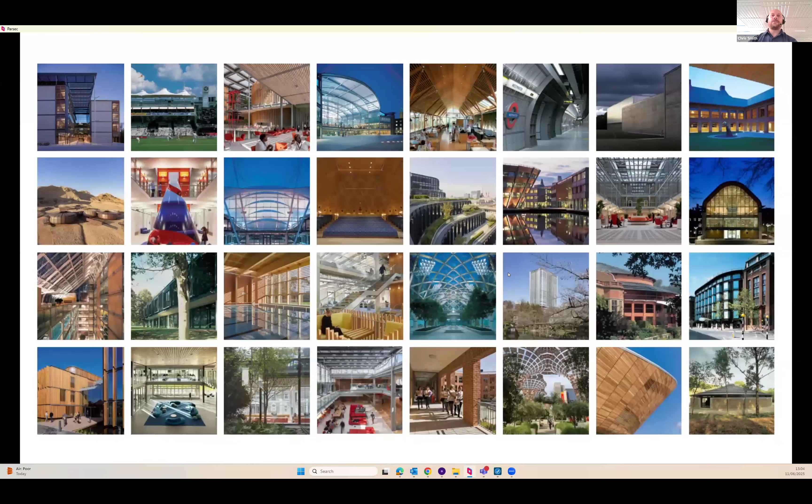So it's just a slide for Hopkins. It shows a vast array of experience and various projects over numerous sectors over the last 40 years. And I think it shows an honest expression of materials and context and engagement with the historic heritage.

And as it's a timber development talk, we've just shown a few examples here where we have used timber in the past, particularly internally. And you'll see some of the details here will relate quite directly to Haileybury as well.

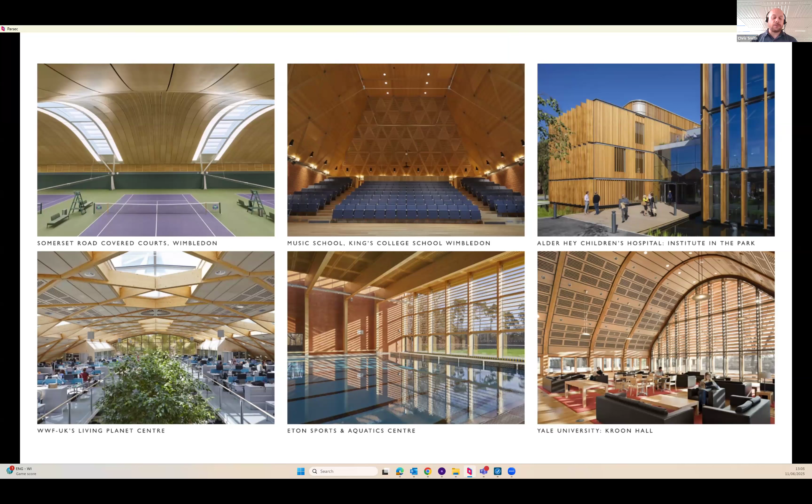Now, I didn't actually go to Haileybury School, but I did go to school quite close by and did sneak into their football pitches every now and then. So I've got a vivid memory of kicking the ball over the fence from about 3 yards out and probably hitting our site from here to here. So that was quite a while ago now.

So yeah, as you can see, the site is to the south. We've got the design technology block. You've got Baker science block, biology, and maths.

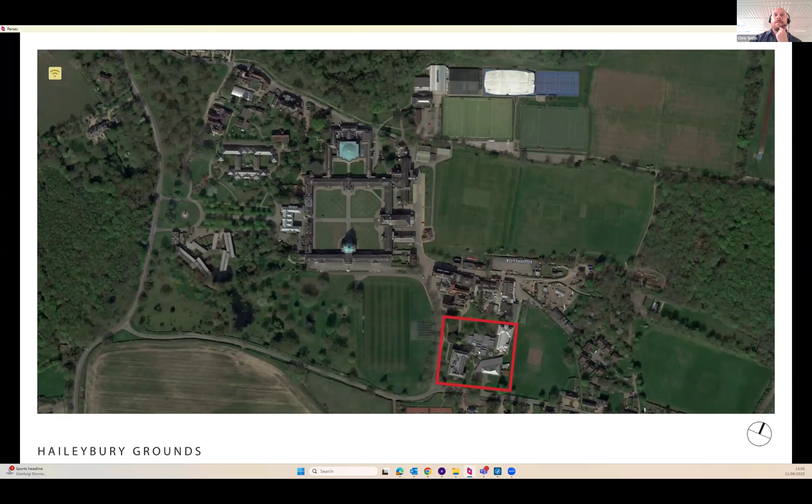So, history of Haileybury. It was designed in 1806 by William Wilkins as part of the East India Company and the East India College. It was opened in 1809. Big, strong quad in the middle. It was closed in 1858 and reopened as a public school. So it basically became Haileybury School in 1862.

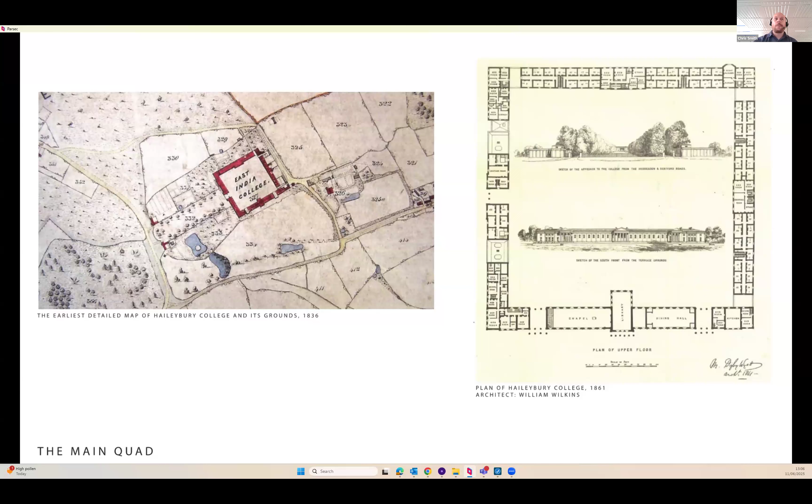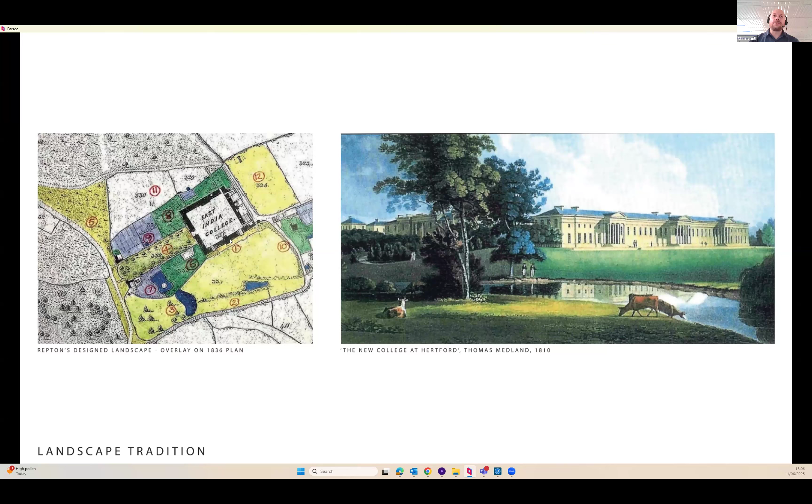So lots of history. It's also got Humphrey Repton landscape design. So this is also a view from Thomas Medland. I think this might be in the Royal Academy as well. So that's just a view from the lake over here back towards the main quad by Wilkins.

Now our site is down here, which is close to the entrance of Haileybury School. You've got Hailey Lane, College Road, and then you've got the Baker building, as we're calling it, which is also the science block, which is shown as moderate significance.

Now this was built in 1932, so it has curtilage listing. So that was built pre-July 1948. So basically, it's got the same sort of restraints as the rest of the listed buildings in the area.

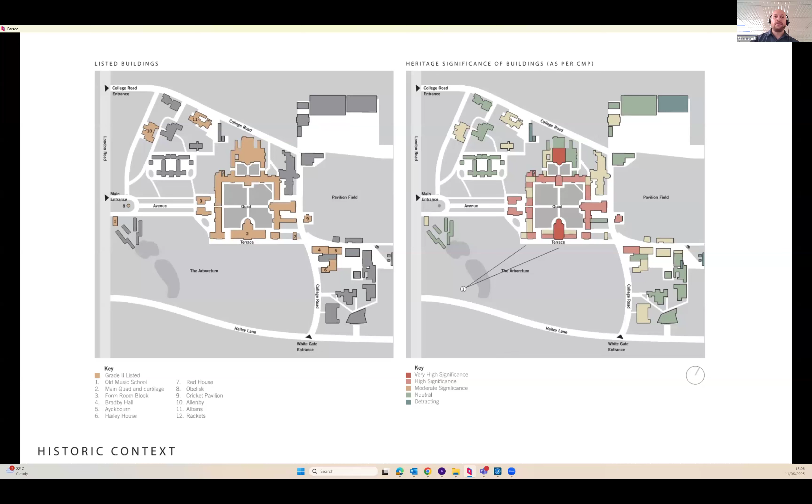So we go forward. So they've got a few examples of buildings on site, quite grand, mainly brick, sort of well proportioned, good rhythms to the facades, and that was kind of the context and the inspiration that we drew on.

So you've got lots of William Wilkins again, and Arthur Blomfield, and Herbert Baker, who we'll come to, but he did this building here, which is basically the one backing onto the site, and the one we connected to, which we'll see in a second. So this is coming down from the main quad. We've got a language of red brick, so strong red brick throughout, all the way to the entrance.

So then existing buildings on the site. So this was as existing. So you've got the biology here, which was kind of single story, not in great shape. Asbestos was found throughout. It was noted as detracting from the historic setting by the conservation area.

We've got maths here, which we didn't actually touch in the end, but we have created a better link to it. We've got the existing design technology building here. Not massively exciting from the facade, but quite an interesting roofscape, and actually it's a building that was working quite well. And then, as I say, we've got Baker here.

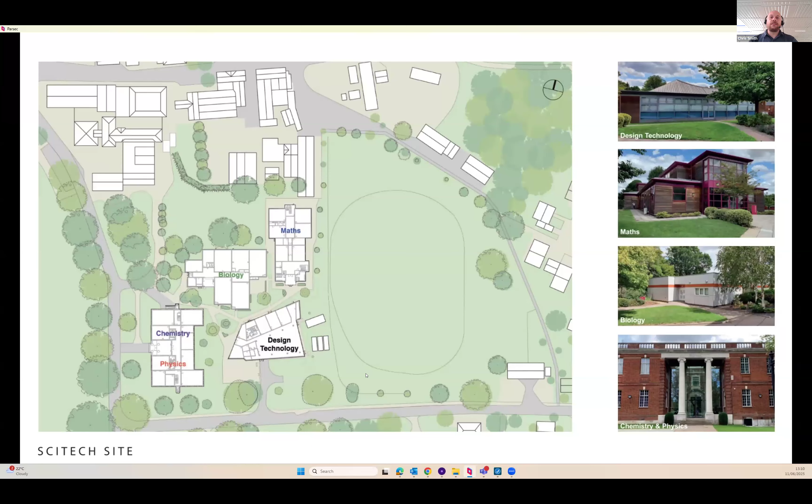So this is looking from College Road to the quite grand entrance, which again is this image here. So you can see on plan, we've got the entrance here. Previously it was just a corridor, and you've got your physics and chemistry labs within.

So to the rear, it's a slight level change, very much inward facing, no access to this side at all. It's all kind of coming through here, through the main entrance, and actually most students were coming through this sort of side entrance anyway.

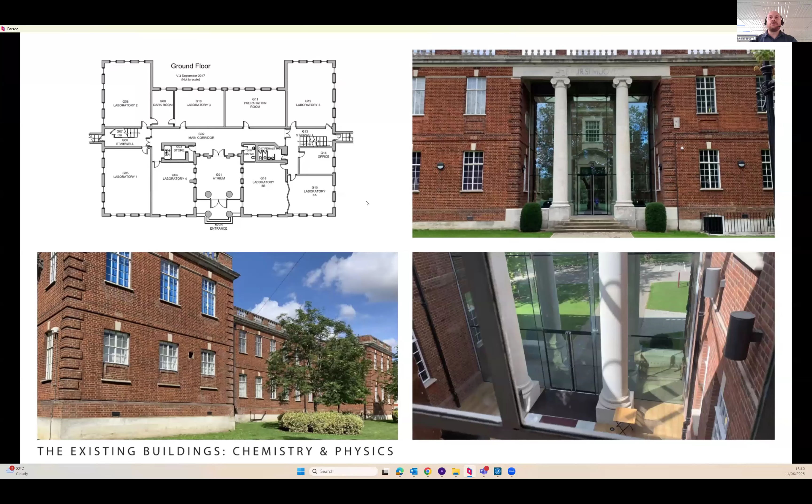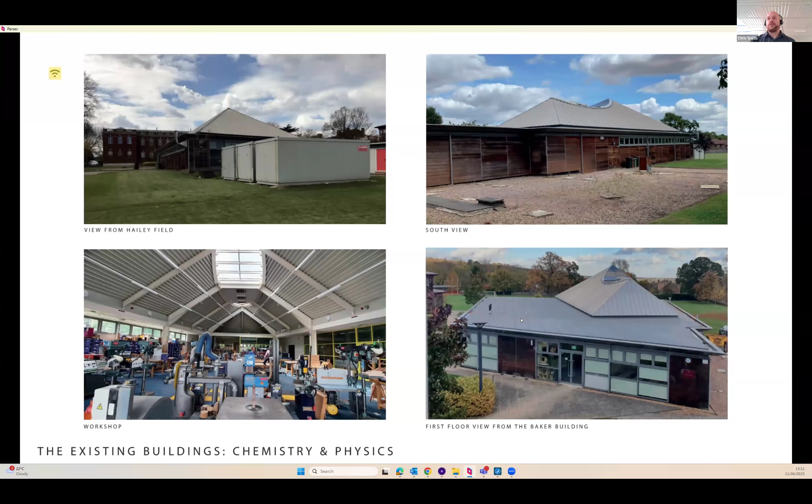So the brief. So essentially, we're taking the four aspects of science, technology, engineering, maths. They wanted to bring them together and create a culture of interdisciplinary learning. So very much a collaborative approach.

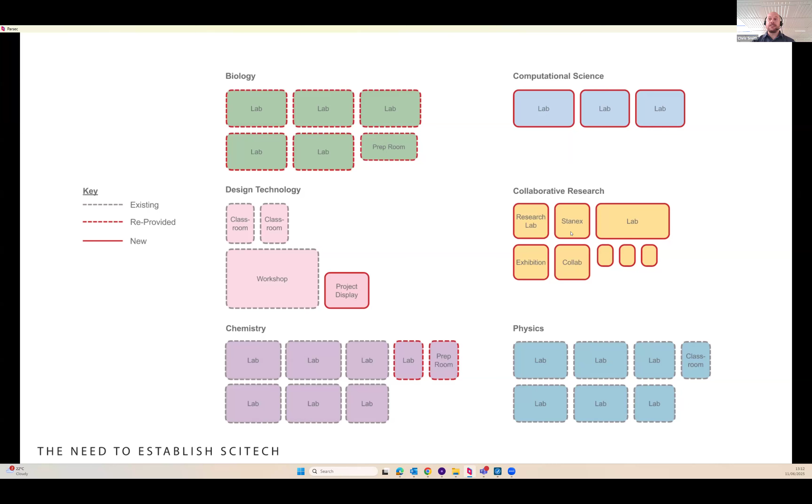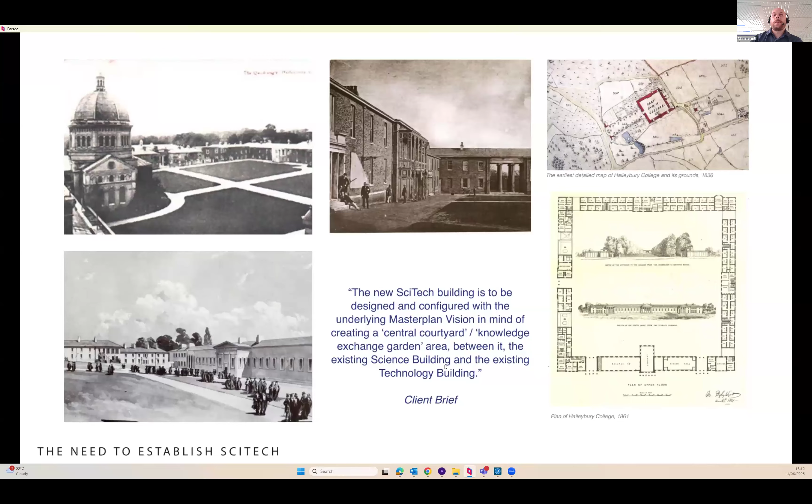So this was a brief follow. I'll come on to it in a second, but there was a master plan, and this was the client brief. So the new SciTech building is to be designed and configured with the underlying master plan vision in mind, creating a central courtyard, knowledge exchange garden area between the existing science building and technology building. So again, that's as it was.

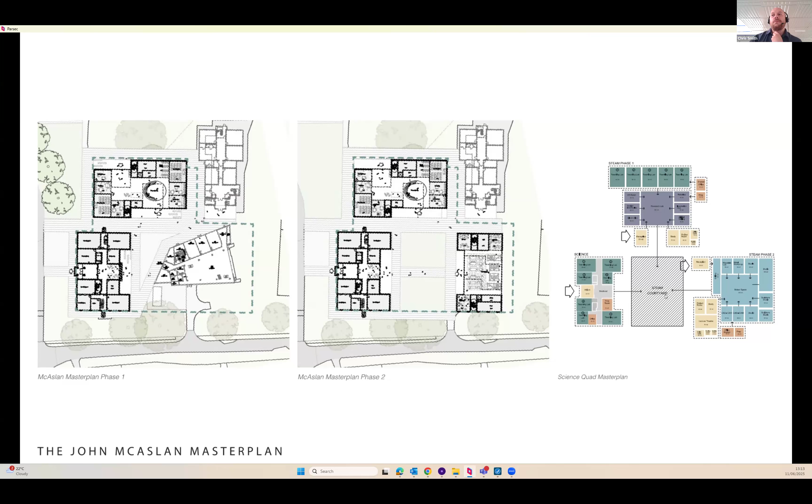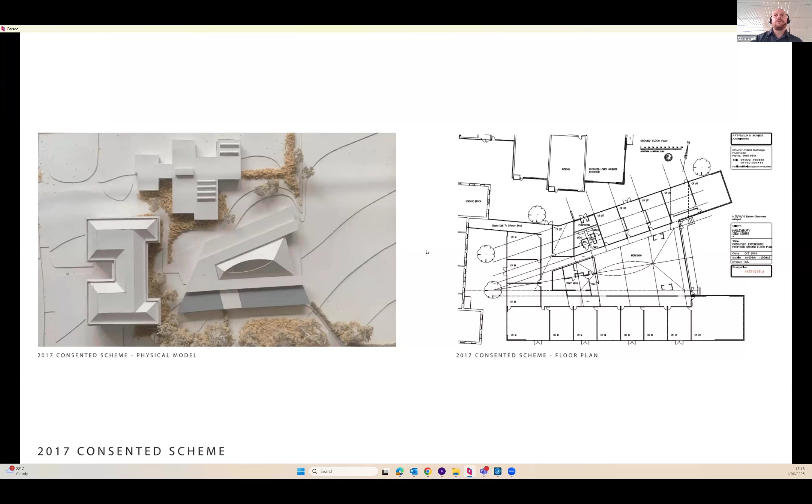In the meantime, there was also this consented scheme back in 2017 for an extension to the DT block, which essentially brought a new line of classrooms to the south and west, and extended it slightly to the east as well. So this model was just lying around in the DT workshop. Mike had a few ideas, and got out his crayons and essentially came up with this concept sketch.

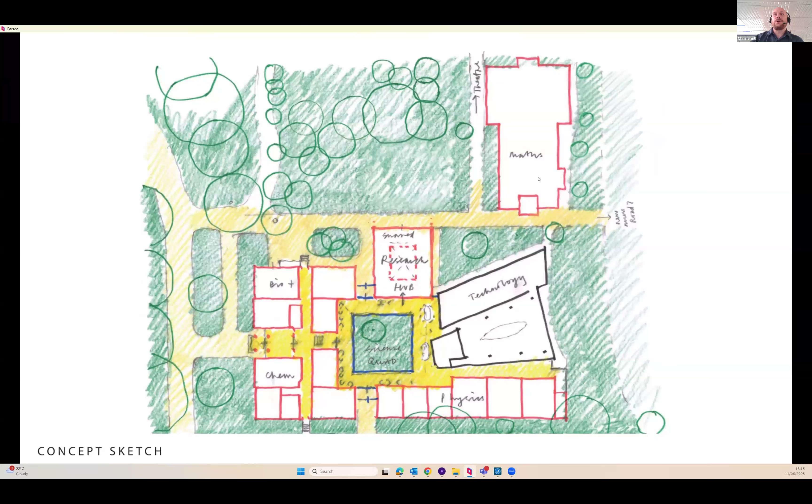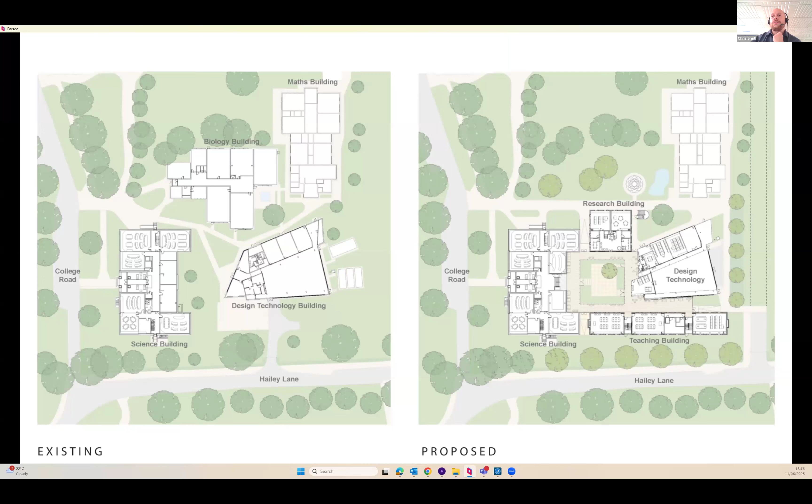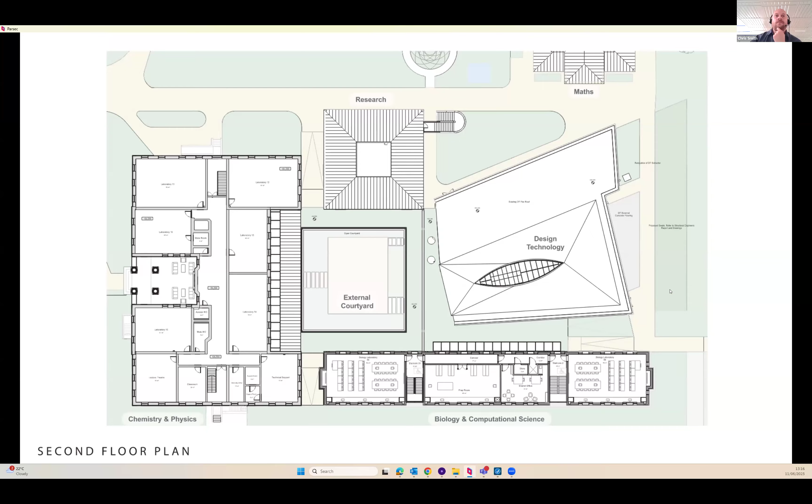Details and materials wise, we were looking predominantly at red brick in relation to the context. We've got the stone banding, again relating back to the original Baker building. And we've got the hit and miss brickwork, which gave a bit more interest to the facade, and was actually used for ventilation of the MVHR units, which I'm sure Patrick will come on to later. The conservation officer also insisted on the roof being terne-coated steel, the standing seam, to relate to Baker. We've got the roof lights and louvers, the passive ventilation at the top.

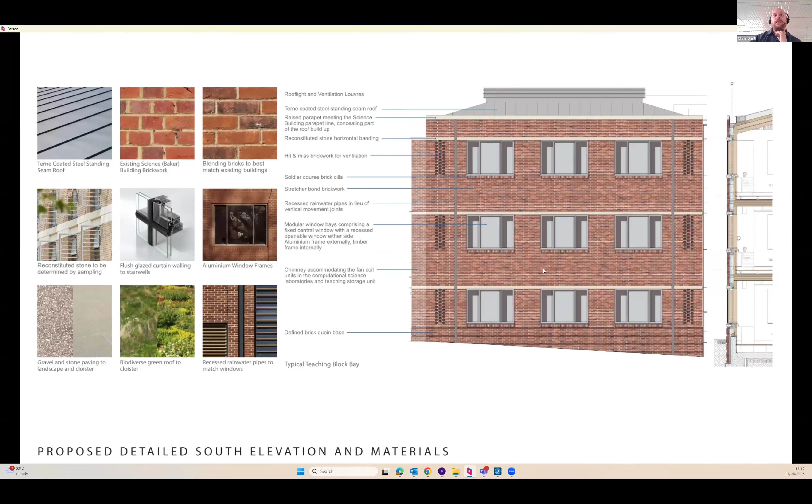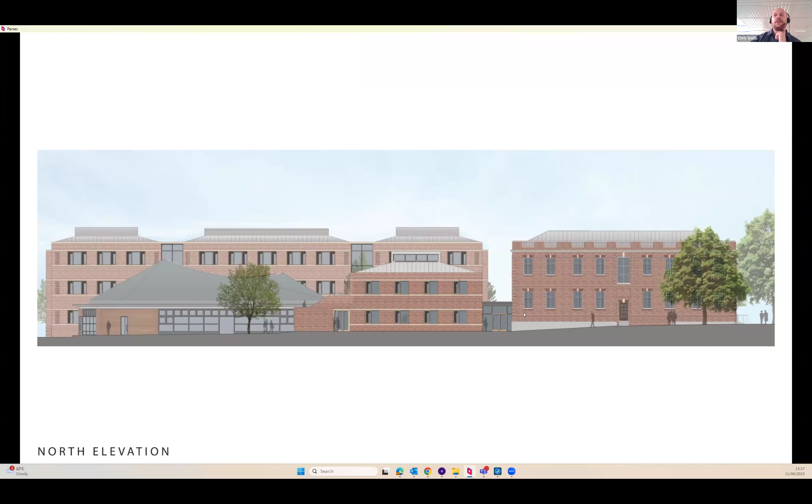So that's it in its context. You can see the conservation officer was very adamant that these should all align exactly with Baker. I won't go into too much detail there. That's the north elevation showing the research block, maintaining DT behind, and the single story cloister link to Baker. And that's it in relation to Wilkins Quad.

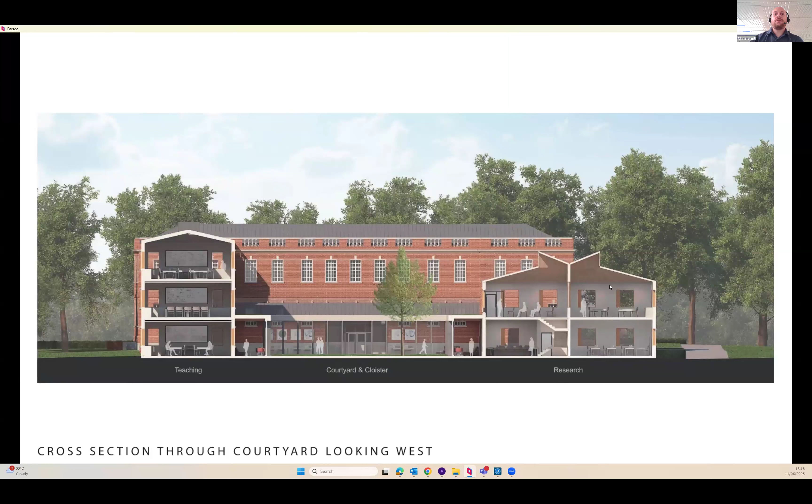3D view at ground floor, again showing most of what I had explained before. This room in particular worked quite well in the end, although it was quite an awkward shape, but actually it's one of the favourite spaces in the final building, I think. Just so you've got a view all the way through. You can stand one side and you can see straight through to Hailey Fields to the east.

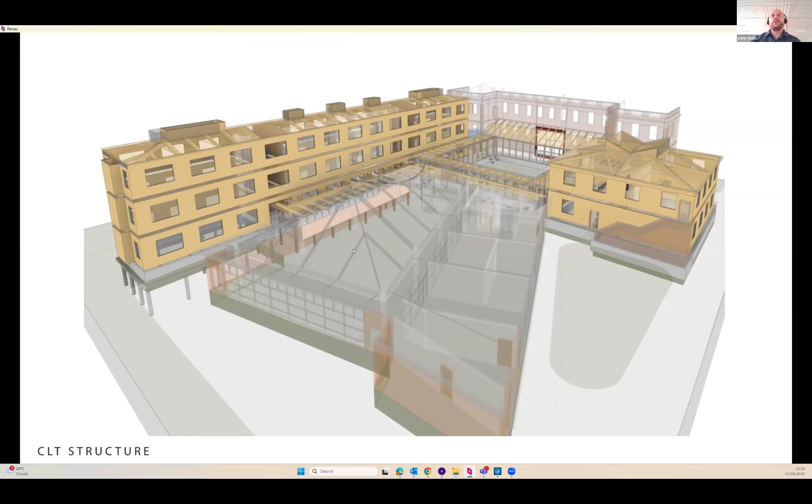So where was the timber? We hadn't got to any timber yet. So seeing this is a timber development talk, this is actually an Integral visual. I'm sure Matt will have some more on this. But essentially we've got full CLT structure, glulam beams to the cloister, and all connected back to the original Baker. And I'll probably let Matt go into a bit more detail on that.

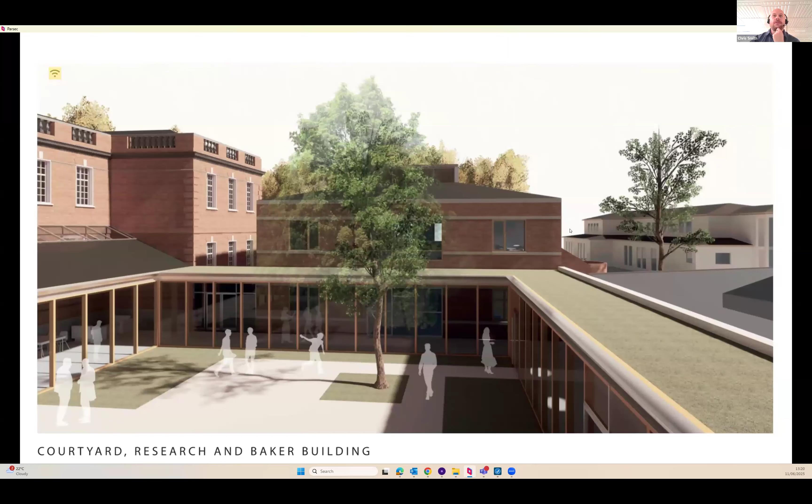And then internally, we basically had a fly through that I think I had open on my desktop for a year and a half, just constantly. Any detail was there, we could just refer to it, and we got some nice views from it. So you've got your timber acoustic panels linking back to Baker, which is now behind us. Got DT opposite. Yeah, that's the link. I think we slightly underestimated the size of that lintel, but that kind of gives you an idea anyway. And again, across the courtyard, looking over to research.

So internally this is sort of ground floor, well, ground and first floor of the teaching block. Very much wanted to expose as much of the CLT as possible. Obviously, there are points where you can't do that for acoustic reasons or fire, but we were keen to try and keep as much of it exposed where we could. And then you've got the acoustic rafts.

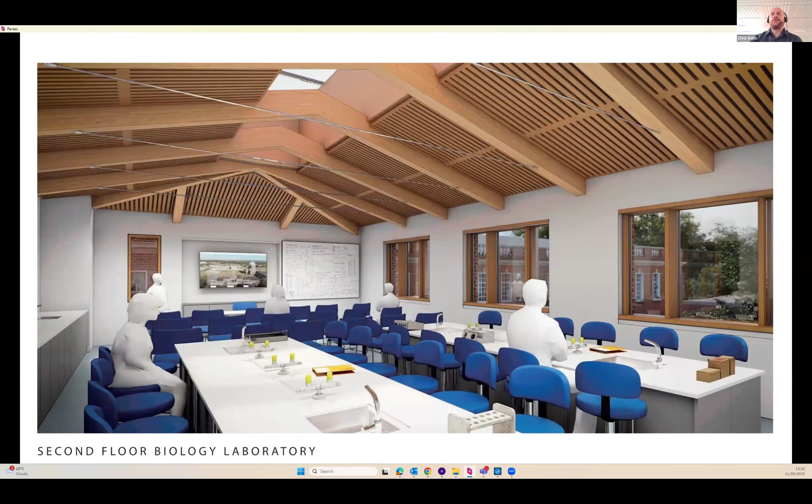And then on the top floor, you'll see in some of the photos, I think the other guys have got it in their presentation, the timber here did actually get value engineered out, but that was the idea. It was all supposed to be timber, and then you've got the roof lights, which also had the dampers in the side for natural ventilation.

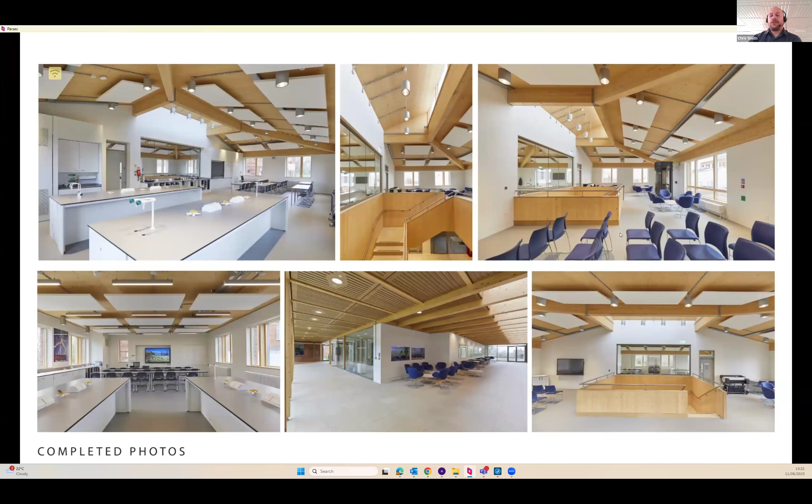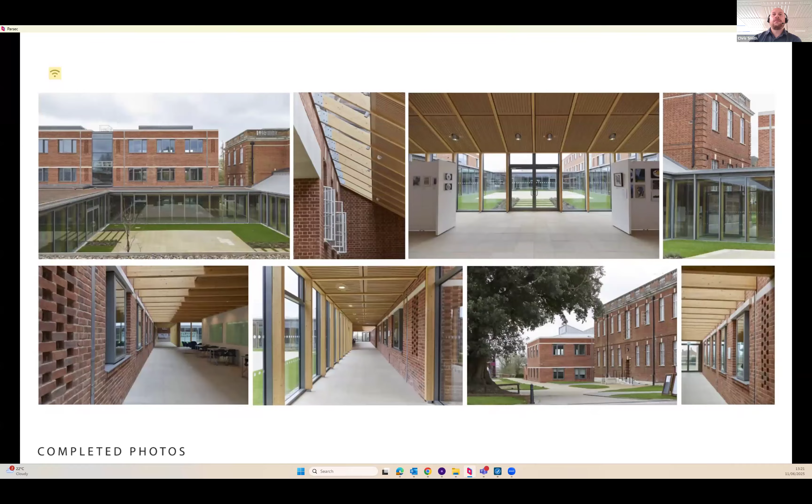And that's some finished images, which hopefully are pretty close to the visuals, really. A few external shots, and I'll just flick through. But yeah, there is a fly through, I showed the guys earlier before the call, that is really good on the Haileybury website. It was a bit jumpy, so I won't show it necessarily. But if you've got time, go to their website, have a look.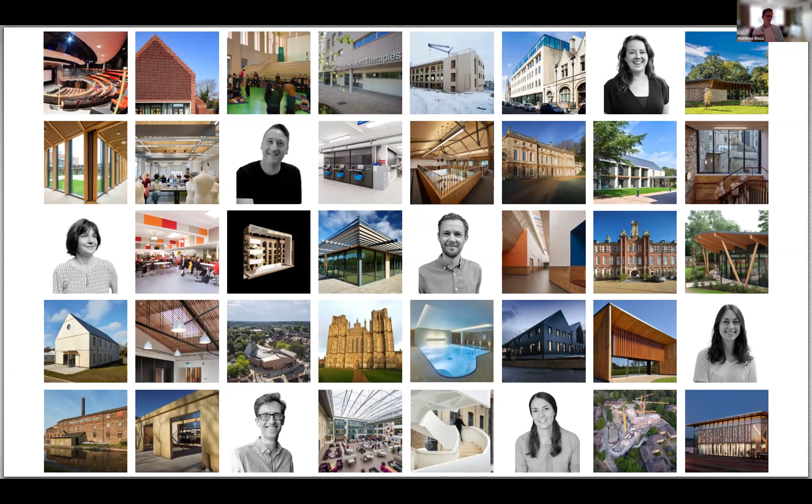Yes, so my name's Matthew Blaza. I'm an associate here at Integral Engineering Design. Integral are civil and structural engineers, based in Bath and London. We very much have a strong focus on education projects, culture projects, and heritage projects, so it's a really good fit for us. And also we love to design in timber where possible. I promised I'd be quick, so let's get on to Haileybury itself.

So I need to make the embodied carbon, the amount of energy that goes into making that building, as small as possible, making Patrick's job later, where he's trying to balance up and generate energy and all that amazing stuff, a lot better. A nice small number to start off with means he's not got to work quite so hard, but he's done a great job on that, which he'll talk about later. But what are the targets? IStructE and LETI have slightly different targets. I guess the IStructE are pushing us to give as much headroom for all the other disciplines, but they're very similar numbers, and they're both very difficult numbers to hit on new build construction, which we'll get into.

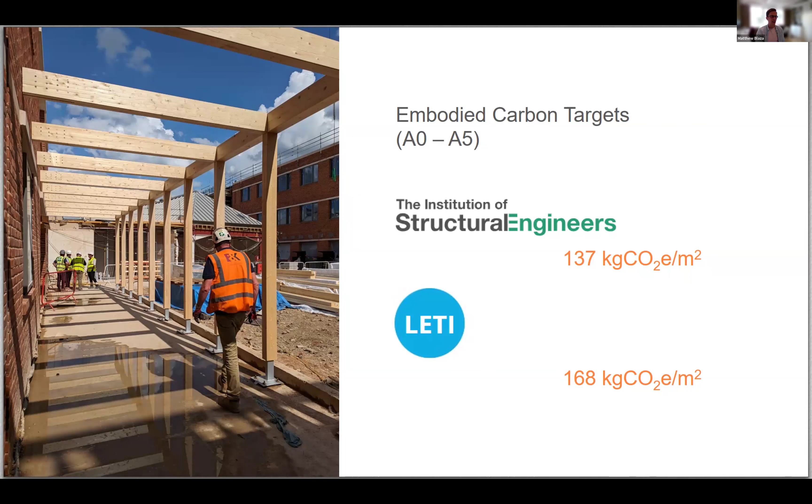So very early stages in RIBA 2, what we actually did was we went through and did a scheme design for a mass timber, a full concrete frame and a steel frame and precast planks. And then all this data was presented to the client, and you can see that there's definitely a lower carbon option. This is higher, obviously, than the number you saw on the previous page, but there is a lower carbon option going for mass timber, so you're saving quite a bit.

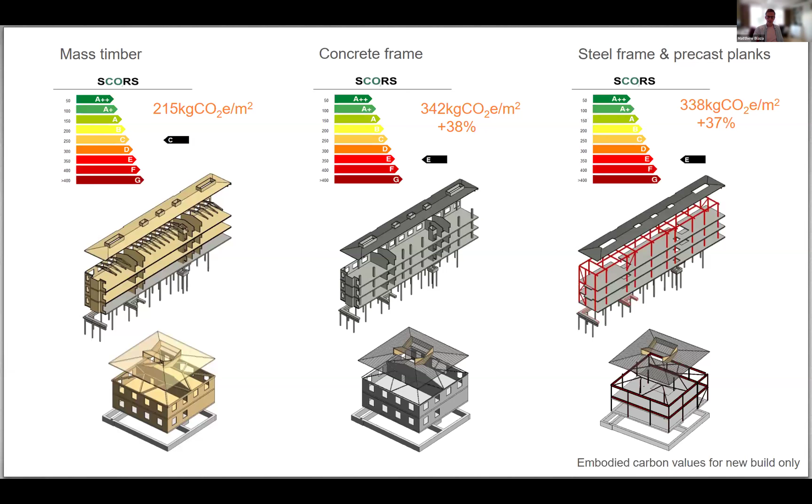It wasn't just sustainability we were selling this on. We also gave a load of metrics about buildability, about costs, about quality, and giving the client all of that information early on meant that they actually bought into what we were doing. So the VE was mentioned by Chris, but we didn't get to the point where we VE'd out the most sustainable thing, the timber frame. So yeah, the effort early on to get them to buy in was quite an important part of how we delivered this project.

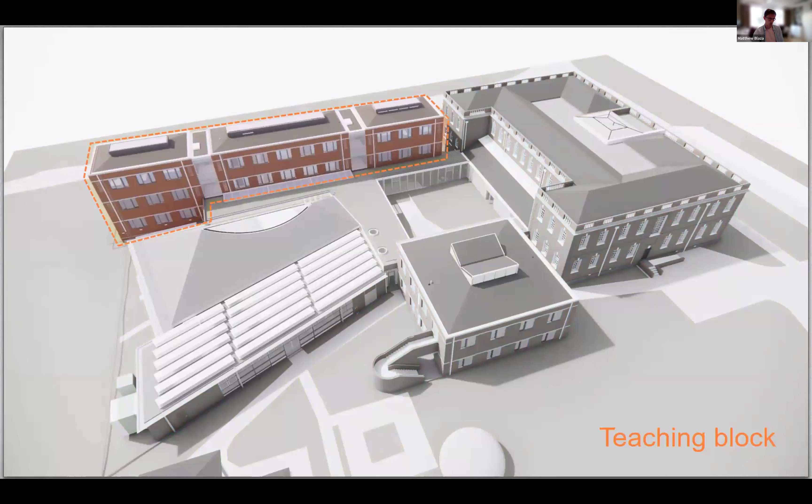So let's actually talk about the engineering of the building. Effectively, there's three bits of this structurally for the new works. So the first one I'm going to talk about is the teaching block. As Chris mentioned, this is the one that we squeezed 3 stories into the neighbouring 2 stories of the Baker building. And it's this very simple frame where you've got external load-bearing walls. You've got CLT panels spanning between.

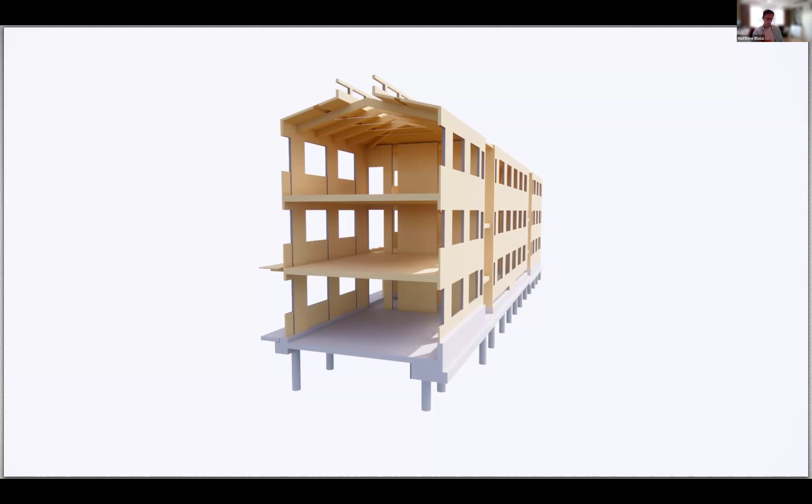This one's actually founded on piles, which doesn't really help our embodied carbon, but it's all to do with the fact that we've got a lot of clay here. It was clay that was going to swell up because there were some dead trees that we had to remove, got replaced. So it's very much within the influence zone of that, which didn't really help our numbers. We've got about 8 meter spans going here.

So we've got 300 thick CLT floor panels, which is potentially not the most sustainable or the least material option. But one of the things it did give us was the slimmest build-up, which really helped in terms of fitting in the extra story. And it also meant that because it was a serviceability governed design, limiting deflection and vibration was the thing that actually sized those elements. It helped when we were looking at acoustics, and it helped when we were looking at charring of these as well.

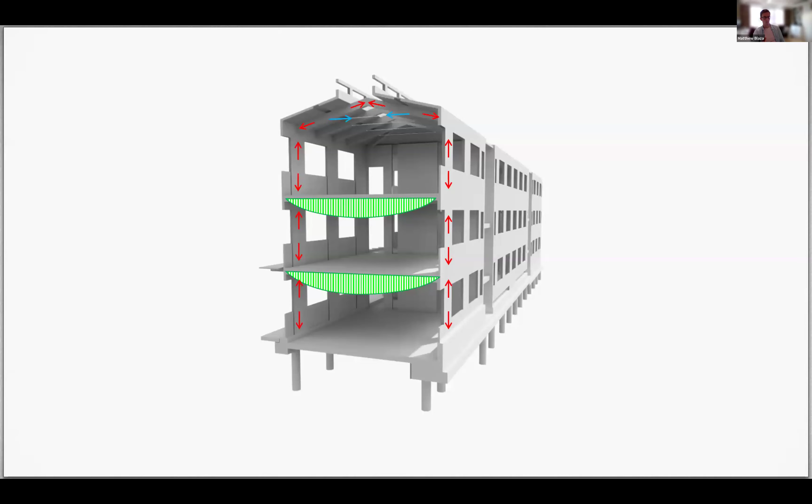I won't go too much into fire design because it's a very specialized thing, and you could probably spend a whole hour talking about it for each different project. But the way that this building was set up, you almost had 3 separate buildings side by side with these lovely exposed stairs, with the timber treads exposed and stone on the top. But each of your compartments is very small, so auto extinction was a lot easier to prove on this kind of project than it would be with big compartments.

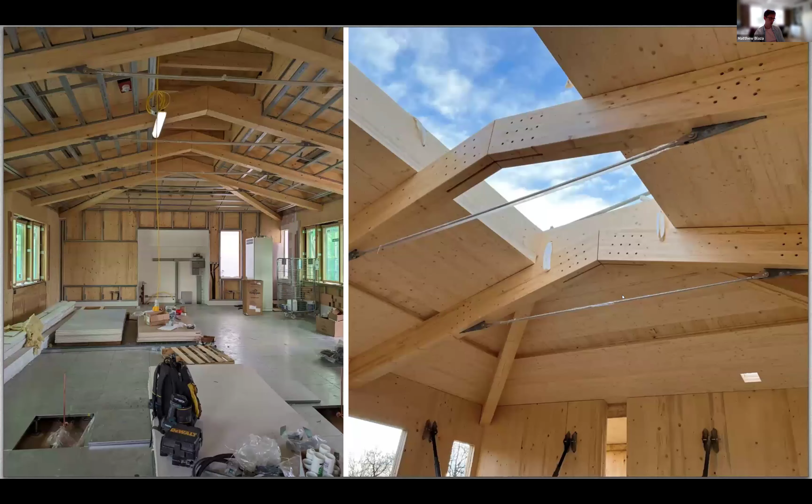Then we get to the roof. So on the roof, the pitches of these are set by the neighbouring Baker building. So they're not the most efficient, but they tie in nicely with all the heritage. Any structural engineers out there will tell you that that's not the most efficient place to put those tie bars. But we positioned them there for 2 reasons. One, because the central portion of this actually has a corridor down the sides, so they weren't passing through there, giving a slightly ugly detail as something passes through a partition wall.

And the other one was a bit more practical in that it moves it to the point where if you've got any high-spirited students, they're not going to be jumping up there and hanging off this bar. They probably could still get to there standing on the benches or whatever, but I don't think that's the kind of students they have at Haileybury.

And then at the peak there, it was an ideal place to put in roof lights, and you can see the vented panels up there as well, which is getting into everything that Patrick is talking about, so I won't talk too much on that one. So what are the numbers coming out of this one? As I mentioned earlier about the foundations, I think we're exactly 50% of the embodied carbon of the structure in getting you up to ground level, and then 50% for the superstructure.

So the things we could potentially have saved on is that thickness of the floor, but there were reasons why we went that way. So whether we would have ended up with a lower carbon for the entire building if we went for a different option is debatable.

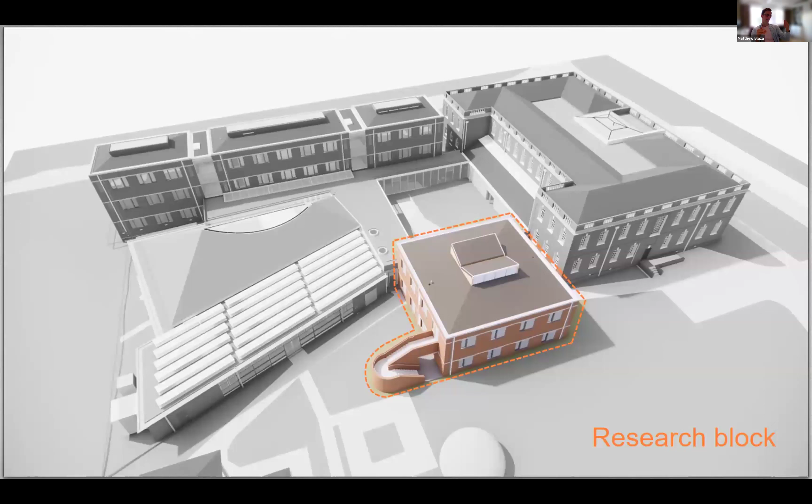So next block structurally was the research block, where we've got this 15 meter by 15 meter on plan building. It was the one that had the loosest brief. So Chris and his team were playing around with it, or we were all playing around with it a little bit more, looking at different options and sizes and massings on plan. And actually the final design of that in terms of the size was driven by where we were partially demolishing the biology building, the one that was detracting from the site.

And we've created this building that is split into two. There's a front half that's very open with this lovely staircase. The wall of that stair is supporting the timber flights, and then the top bit actually spans as well, so it's like a sculptural element. And then we've got this butterfly roof light in the middle, which engineering-wise is the most interesting thing. This is just the model with everything stripped out.

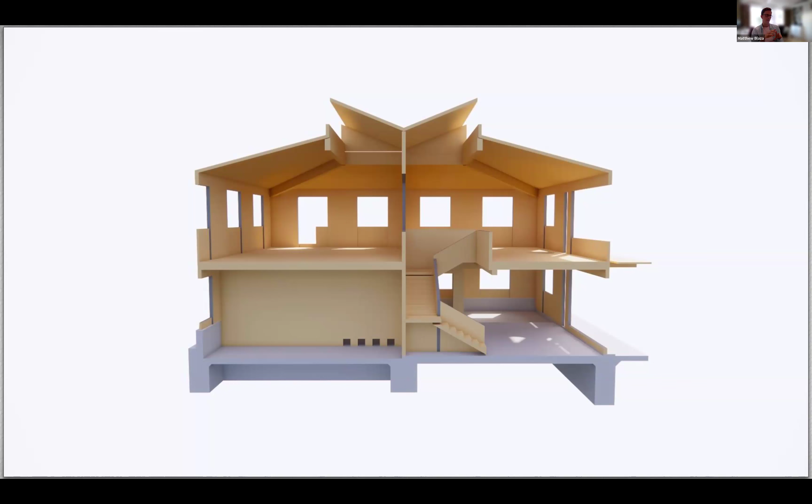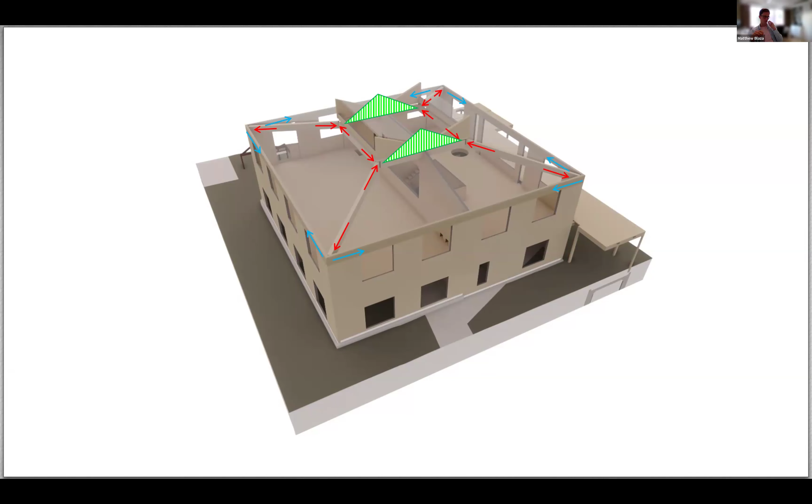So you can see we've got this ring of glulam beams at the top that come down to a ring of glulam beams at the eaves level, and then hip members span between them. So a little force diagram. So actually that top ring is acting like a propped cantilever. So the members come out, they're then propped by the hip members. So they're acting in compression and they're trying to spread out. And then the ring at the bottom is stopping all of that from spreading out. So it's actually quite an efficient overall structural form, but did require a little bit of coordination.

So with the sizes of those, the underside of the ring beam at the bottom there is the head of the windows. So that was setting the depth of those members. And then the hip members needed to come down. So the underside of the hip member noded out with the underside of that member, but then came up to the top, and it all fitted together. So we were going round and round in circles looking at the worst case bit and then making sure that works in terms of geometry going round.

And then we've got this steel node at the top that is all expressed. Again, we spent quite a bit of time modeling that in 3D, looking at how that would work visually, but also how it could transfer the forces over. So we produced some fairly detailed early designs on that. The project was delivered by BK Structures, and Ingenuity did the final design for them. And this is what they came up with.

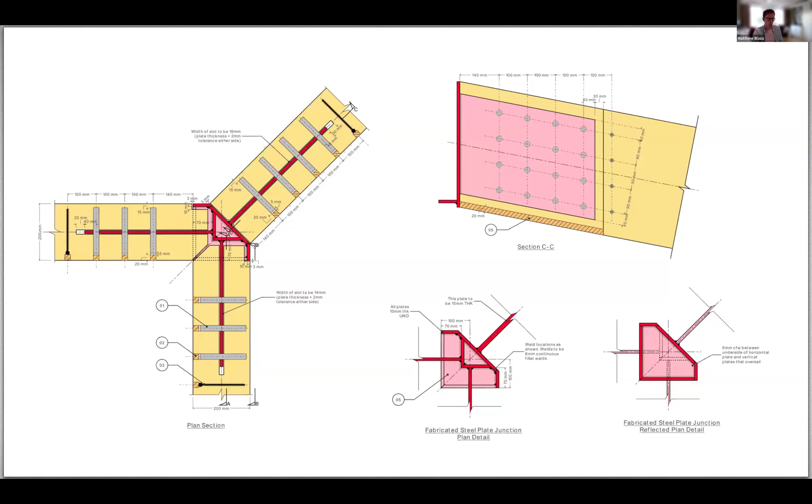But the only difference between this and our stage 3 design is they switched bolts out for driven studs going through. So there was a lot of effort went into that, and we've got this little detail where, thinking about buildability, it's a kind of shelf where the timber can come and sit on the steel. So thinking about how that gets put up was an important part of how we delivered this.

So embodied carbon, this one is a little bit higher in terms of per meter squared number. So 258, the other one was 25-something. I can't remember now. I probably should have had it in my head. This one actually was 60% in the ground. And so again, this was strip footings, but we really pushed down the grade of the concrete to minimize how much was in that. But it's almost that the building above maybe wasn't right sized, and if we'd gone more, it probably would have offset the amount of concrete we need to put in the ground. But again, it was driven by the ground conditions, and your ground conditions are your ground conditions, so it's a huge amount.

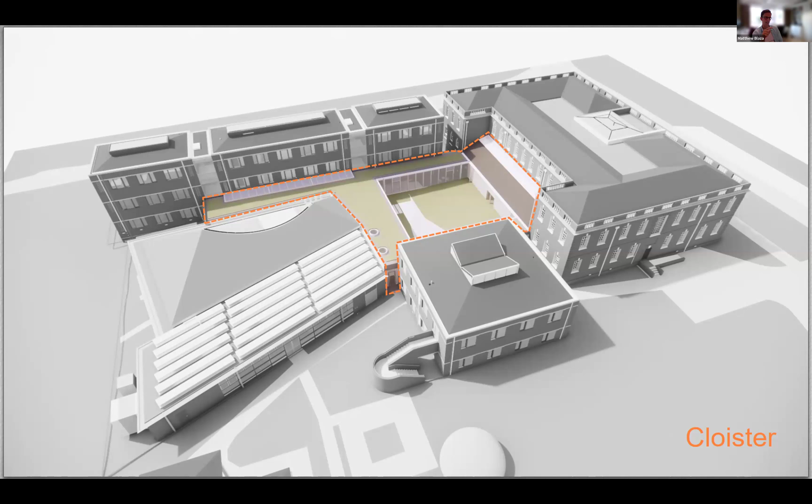Final bit, the cloister, which, as Chris mentioned, is a kind of key part of the entire design. And the cloister includes the links to the two existing buildings on either side, and how we then refurbished the areas of those.

So one of the things we did on this project, and that we always push to do on our timber frame projects, and we made sure it did actually happen on this one, is we tendered the timber frame early. So we tendered that at the end of stage 3. We got them in during the stage 4 design. So they were appointed and working away, designing, getting space in factory, etc.

Before we then appointed the main contractor, which made sure that we were checking all those little things that we'd coordinated in terms of depths, making sure that connections are hidden, etc. They were then making sure they were actually deliverable, which luckily, because we had spent the time, they were. And the only real change that they made was a buildability issue, and that was on this central cloister.

They changed it so the two main buildings went up, the timber frame went up with those. Then these big long brackets stick out and pick up the cloister timber later on. But the brickwork was then built past, which helped Chris with his detailing in terms of waterproofing and lots of the sequencing works. And then they came back with a later site visit to install that.

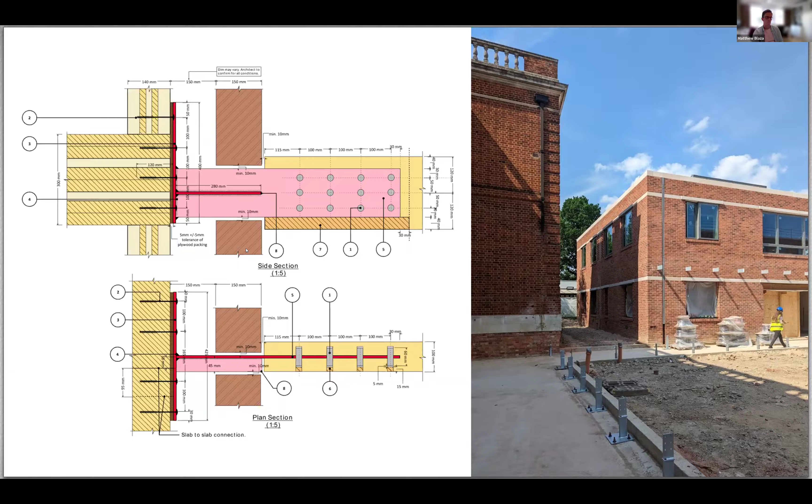So thinking about how it's actually going to get put together, the final panelization and whatnot, all came earlier on so that we could deliver it smoothly on site and make sure it was open in time for the terms. So as Chris mentioned at the start, obviously adopting a timber frame is the way to reduce the embodied carbon as much as possible for the new structure.

But we were really close to being an A, at 154. If we got to 150, we would have been an A. And so we were under the LETI target, not quite at the IStructE target. But the biggest thing that we did was keeping the two buildings, definitely keeping the DT and linking in with the other buildings. So effectively you're creating a larger building with a lot less energy because you're making use of what's there more.

And then I've put down there the biogenic carbon, so that's how much carbon is locked into that timber frame. Again, that's another hot potato about whether you should be using that or not. But I think getting the embodied carbon of the actual structure, the top number, as low as possible makes Patrick's job to then get to net zero a lot easier, at which point I will seamlessly hand over. Hopefully hit the right button.

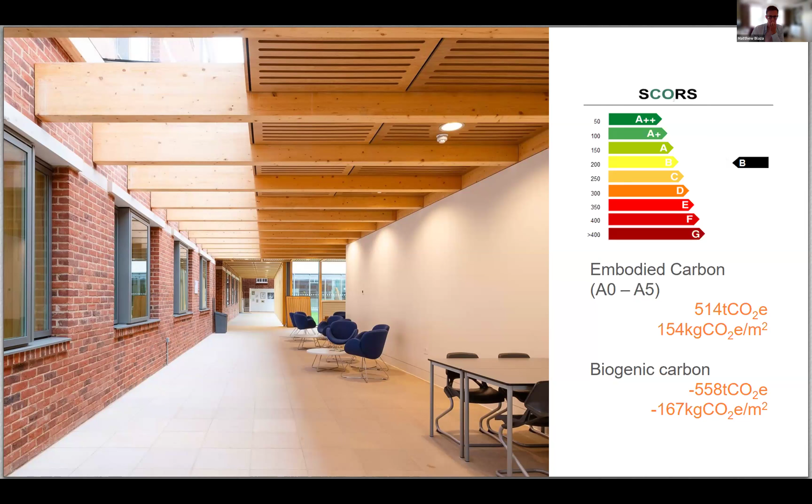Just sharing my screen, anything coming up? There we go. Well, good morning or good afternoon, everybody.

I'm Patrick Bellew. I am an environmental engineer, and I was the founder of Atelier Ten way back in the dark depths of history. In fact, we set the business up in 1990, and I'm wondering why my slides are not going on. Okay, so founded in 1990. I'm going to zoom through this first bit then. We're building services engineers. We were also the environmental engineers and lighting designers on the project.

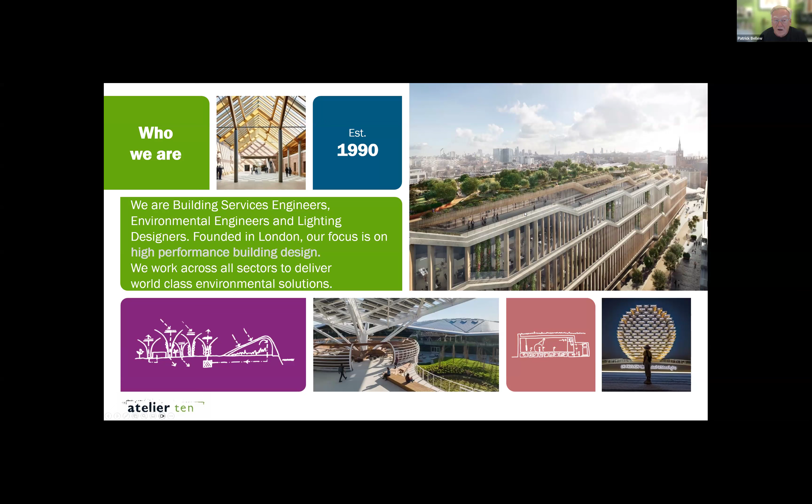Our world has always been around high performance building design across many sectors, and we have been working for 35 years on trying to design more environmental buildings that do more with less, which I guess is a familiar mantra, and Matthew and Chris already addressed it. I've worked with Hopkins personally for more than 40 years. I worked on an infant school back in about 1980-something, in Fleet in Hampshire.

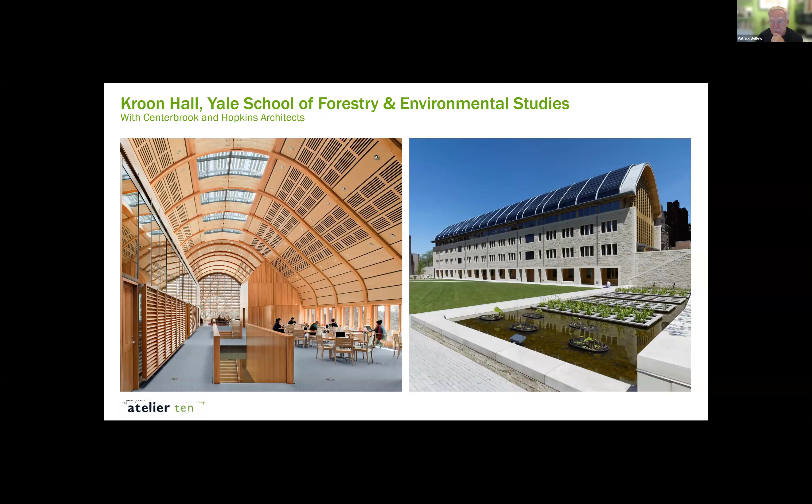But more recently, we did this lovely building, Kroon Hall at the Yale School of Forestry, which heavily emphasized timber and particularly different ways of distributing services in buildings that are relevant to this project. And then the multi-award-winning WWF headquarters building in Woking, which also makes extensive use of timber construction in its various guises. So we have a very close working relationship with Hopkins, and that confidence in one another was very helpful in the project.

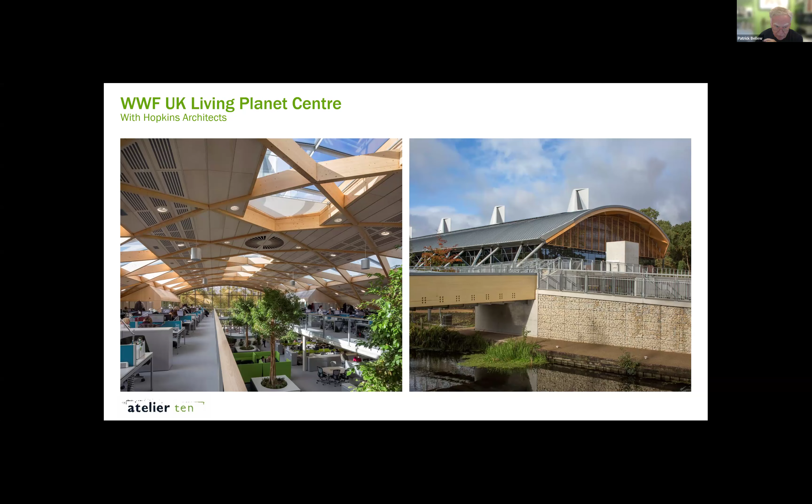So what we were doing with the project as a whole, as a brief, was to try and minimize carbon dioxide. In terms of the statutory requirements, the East Herts planning policies set an energy hierarchy, which is fairly consistent with most others, around reducing demand through passive measures, efficient services, then looking at zero carbon technologies, and then finally offsetting.

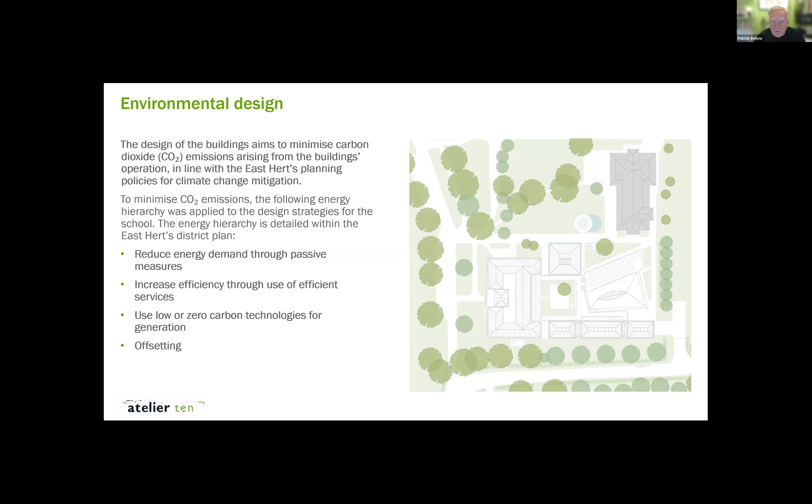But there was no specific requirement for us to benchmark or to submit energy figures beyond the building regulations. So as it turns out, we did a lot of the work in the background, but we didn't actually produce a BREEAM rating for the building, just because the client didn't feel they needed to do it because it wasn't part of the planning.

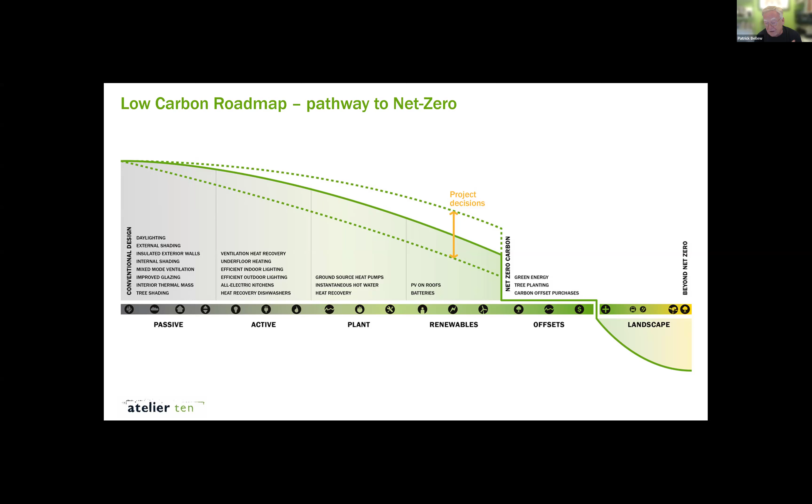So the low carbon roadmap that we're all kind of familiar with on buildings, which is, how do you use passive design around the way that the building is organized, daylighting, good ventilation, mixed mode ventilation, those sorts of things, high quality building materials, active systems to do with the ventilation and the types of heating, potentially with efficient plant, in this case using ground source heat pumps, and looking at PV on roofs. So all of those in the course of project decisions get the carbon emissions lower and lower.

But I think it's interesting to reflect that where we are now, in the way that things are thought about, and as Matthew has alluded to, this pathway to net zero intertwines embodied carbon and operational carbon in a big way, because you have to now be much more cognizant of the embodied carbon. In reality, when you have heat pumps for conditioning and potentially plenty of renewable energy in our power supplies, the embodied carbon is a much bigger part of the impact on a building today, or looking forward to 2030.

And some of the decisions that we make, for example, if you put a lot of aluminium shading on the outside of the building to do a tiny amount of reduction in heat gain, you don't necessarily ever get that carbon back. So a lot more of the work we're doing, and we did on this project, was around how do you balance the embodied and the operational carbon, which is a big question these days.

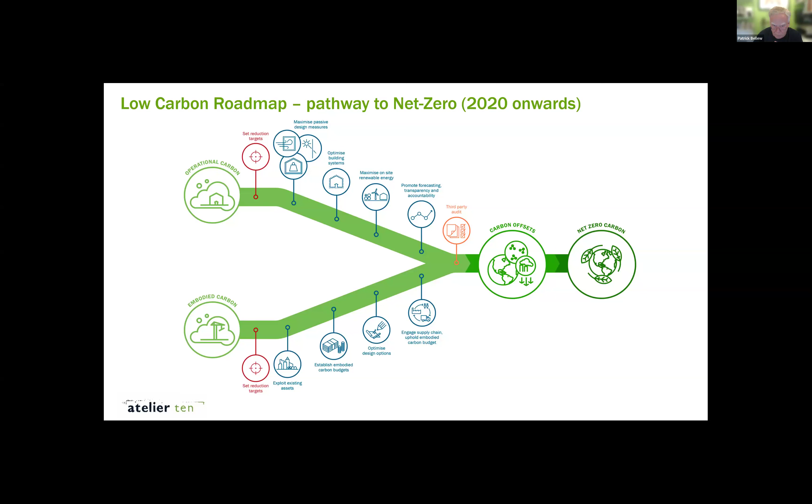And so what that comes down to is very much about agreeing the brief early on, because the big question was, how much of these labs and teaching rooms would need to be mechanically ventilated and conditioned? How much of them could rely on natural ventilation? Because the building mimics the forms of older buildings that predate mechanical systems, the 8-meter floor plan depth is perfectly good for natural cross ventilation if the internal gains aren't too high.

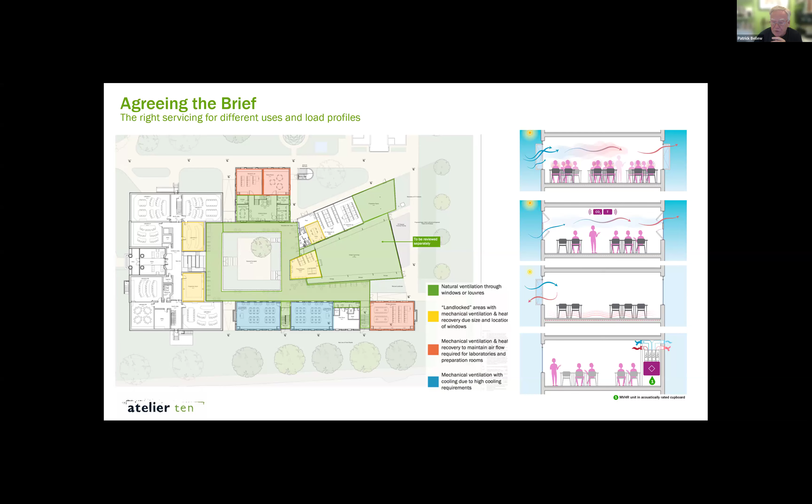And so we went through an early process of identifying the right servicing for the different parts of the building, which I wouldn't say is unique, but it's a very important way of thinking about how you do passive design as we move forward, with the goal ultimately being simplicity. Making it simple will always result in lower carbon emissions and lower embodied carbon, particularly for the services.

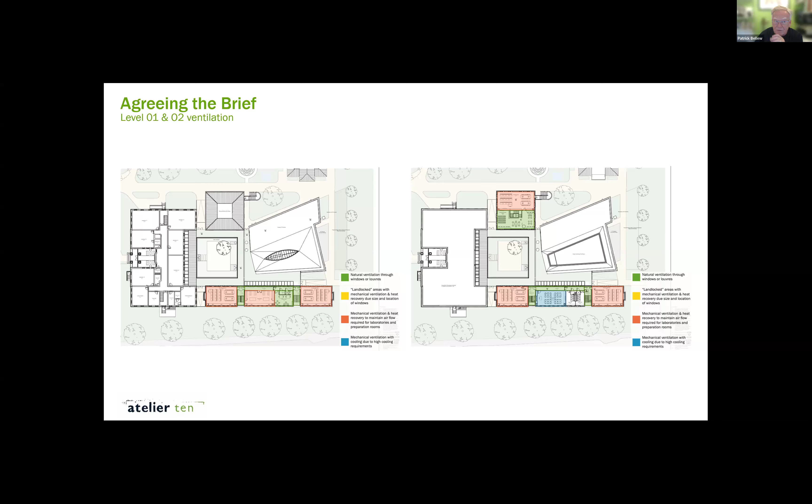And then the main move in terms of the low carbon technologies was to use water source heat pumps, so we have no noise from above ground equipment, which heat pumps can be guilty of, and a closed ground loop system, which is something we'd experimented with at WWF, and an open loop system at Kroon Hall in Yale. And so this is all about minimizing the carbon impacts in the operation of the systems by using very low carbon energy and all electric technology, so no gas, no emissions on site.

And as I mentioned, natural ventilation was the first prize. We did analyze it using a program called MacroFlo, which is the airflow analysis that's embedded in the IES suite of computer software. So we were able to really be confident we could design for natural ventilation. Most of the space is a dual aspect, which is good for cross vent.

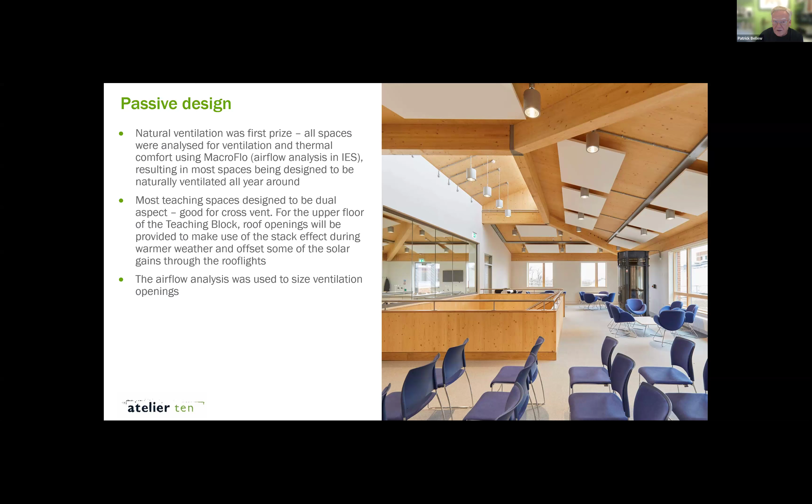And as Chris mentioned, the upper floor's got the louvers in the top of the butterfly, which allows stack effect and also a certain amount of Bernoulli effect to increase the ventilation. And we used that analysis tool, MacroFlo, to right size the ventilation openings. And we then used Building Bulletin 101 as our design criterion for overheating to determine both glazing performance and to understand particularly how ventilation would impact on temperature, and to understand a little bit about thermal mass in the building.

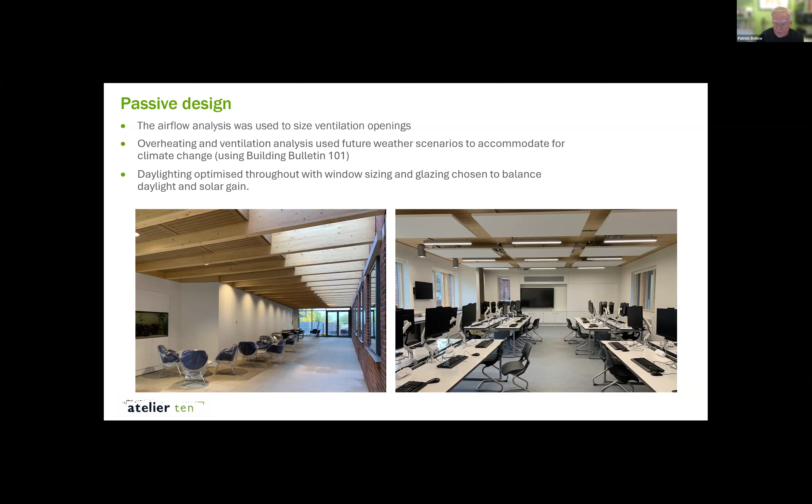Now, thermal mass is a really big question with timber buildings. We're aware that in a building that's thermally massive, you would often look for concrete, and in this building we wanted to make it fully timber. So I studied what impact this has on the overall temperature control. And if anyone's interested in the numbers, I put these in.

And of course, with schools, we do get the advantage that the schools are rarely, if ever, occupied during peak temperature times. You might get a little bit at the early part of the term in September, a little bit in June, July, but overall, it's not. We found in modelling that very rarely will we exceed the temperature limit with natural ventilation, and the benefit and the simplicity of natural ventilation and the reduced cost was very much worth taking.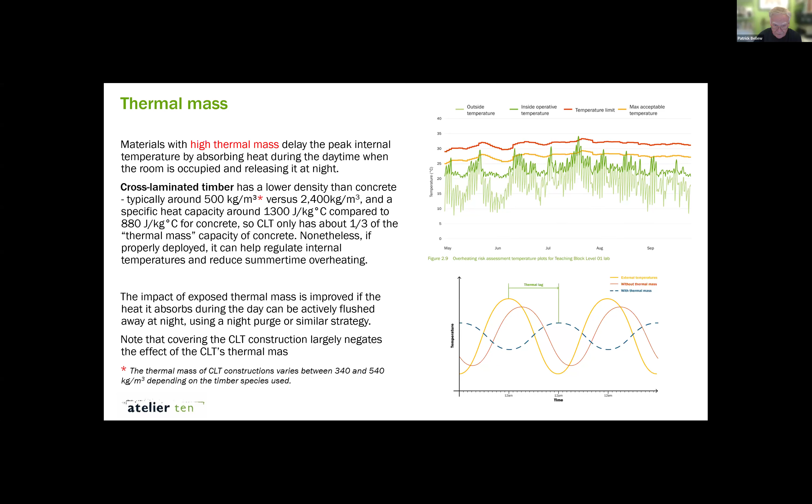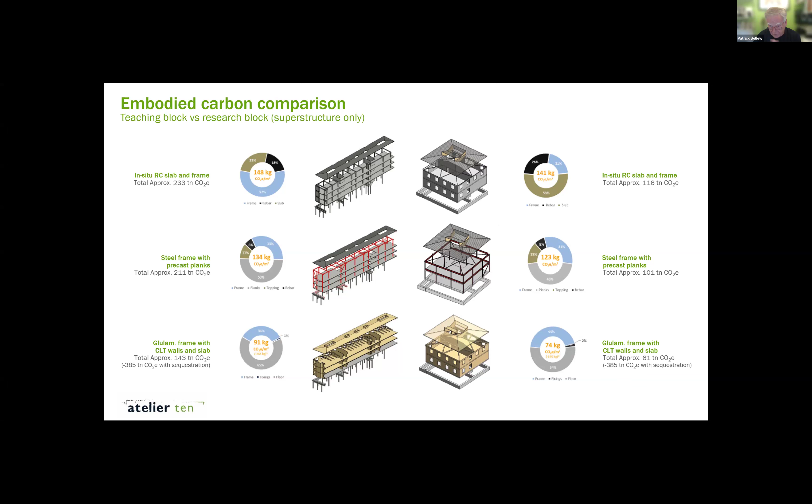Systems: we used 4-pipe ground source heat pumps, which means they can heat and cool. We've only got about 25 kilowatts of cooling capacity, but it runs quite a lot of the time because it's cooling computer systems. We've got a buffer vessel that holds the water and allows us to buffer against some heating and cooling. MVHR in the classroom, the labs and prep rooms, and then natural vent in many of the classrooms, as we said, and a little bit of cooling where we needed it.

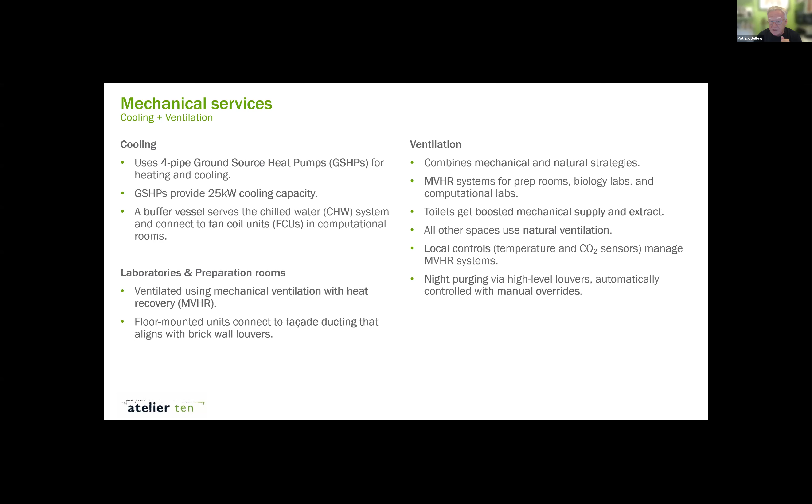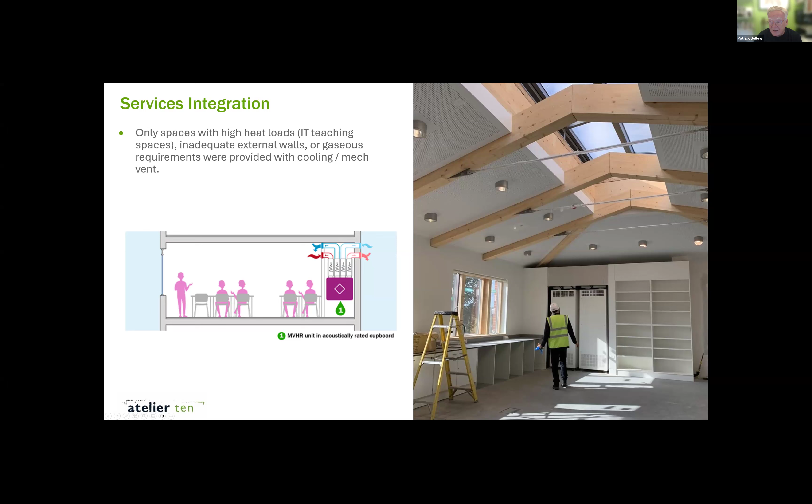The units, you can just see, I've got an image here. This was the graphic that shows the MVHR and acoustic rated cupboard. Again, we were trying to absolutely minimize the amount of ducting. So these units just sit in the corner of the room and change the air several times an hour to give you the managed airflow and managed air quality that we wanted. And then you see on the outside these hit and miss vents that allow the air to come in.

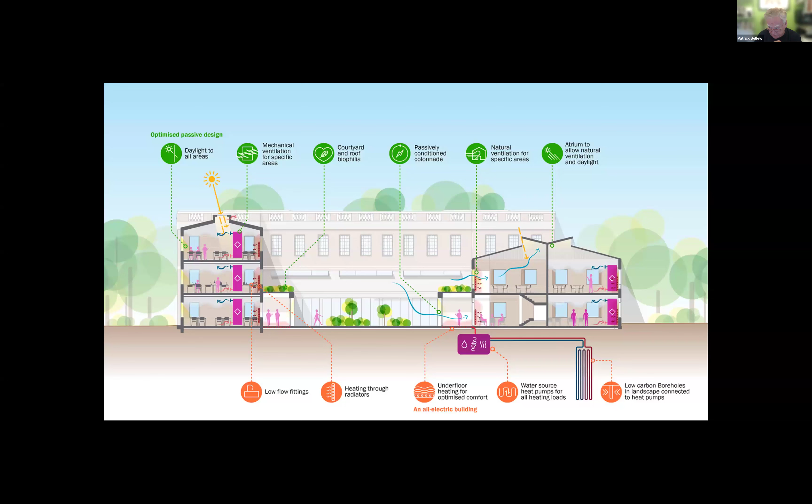And then the other elements were the underfloor heating in the cloister area, perimeter radiator heaters in the other areas to deal with the facades, and a pretty simple design. And then finally, for renewable energy, the SciTech block has a PV array on the roof, which delivers a certain amount of the power.

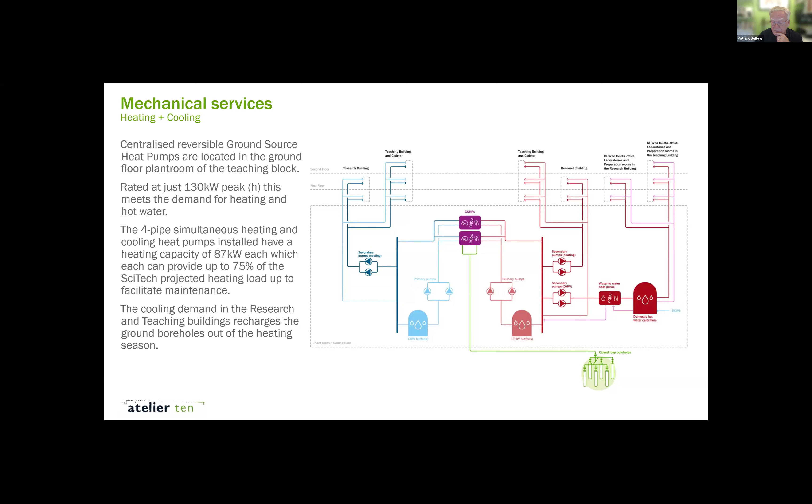The ground source heat pumps are rated at just 130 kilowatt peak. We've got two units rated at 75% each, and they're doing heating and cooling. They can do both simultaneously if necessary. And of course, taking a low carbon fuel supply, where the electricity is bought from a low carbon supplier, means your net heating and cooling has a very, very low operational carbon.

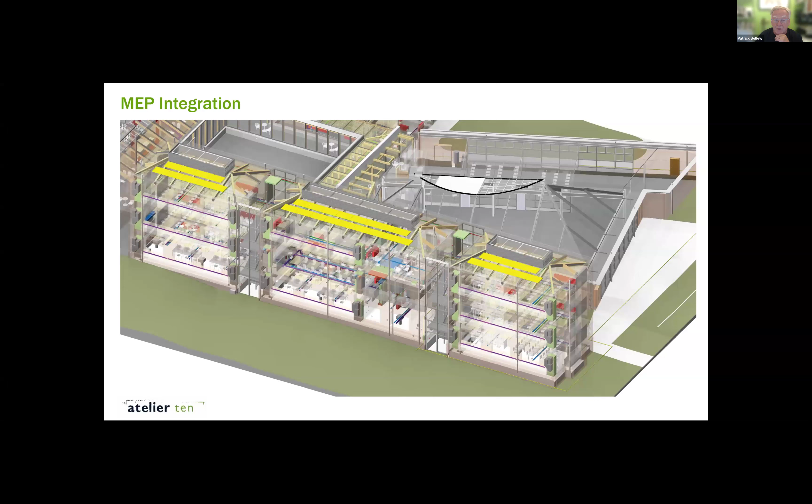The other thing with these sorts of timber structures, and particularly working with architects like Hopkins, is the MEP integration. This is a view of our BIM model, and every single component of the building was registered in the BIM model. And the tricky part of course with these buildings is that you really want to not see MEP on the surface of CLT where it is exposed.

We have a raised floor across the whole project with cable trays, pipes under the floor, and so on as you'd expect, and then integrated into the wall structures, these rebates that allow us to hide a lot of the MEP services.

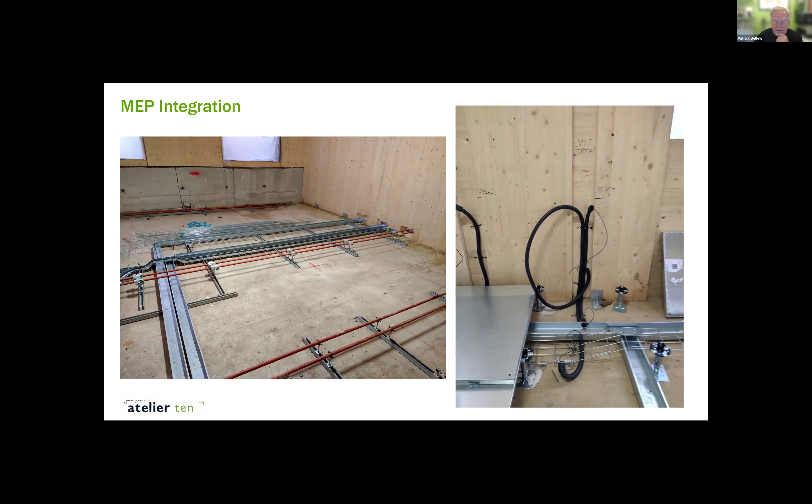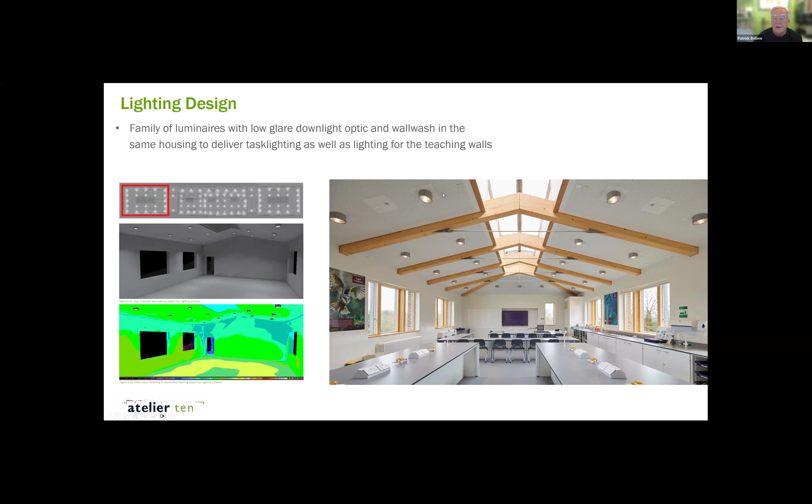My colleagues at Atelier Ten and their great lighting team did lots of work with Hopkins, multiple times now, looking at how we develop a family of luminaires that provide the lighting, and then how we integrate them into the ceiling structures. So this is an integrated light fitting in an acoustic panel, and you see it too in the cloisters, where the timber acoustic paneling is all integrated seamlessly with the lighting.

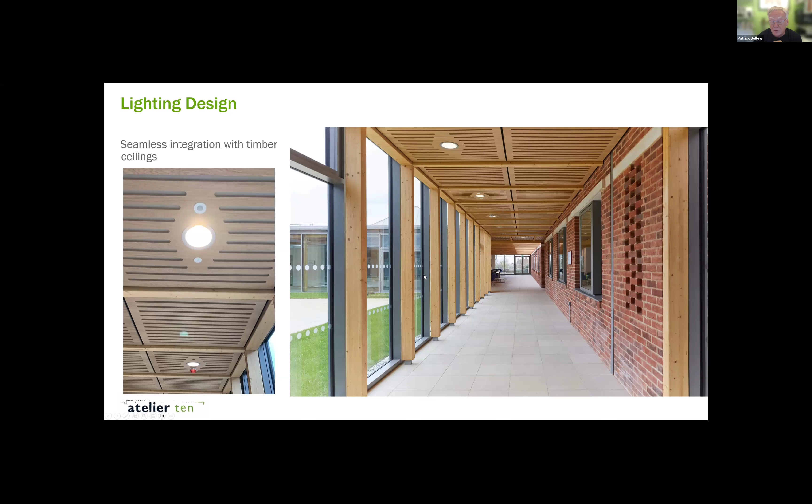Thank you very much. I'm glad you brought that slide back up there, Patrick, and gave it a bit more airtime because I thought it was really excellent. But yeah, thanks for all the presentations. Good to see lots of questions being asked and answered.

I thought I might just start with two very recent questions about the wall and the brick leaf. Chris, I noticed you were typing an answer, but since two people asked, I'll quote one: to clarify the wall stratification, how the timber inner structure works with the external brick leaf. They also asked whether there was insulation between the internal and external layers. So, how the timber wall and the external brick relate. Would anyone like to take that?

Am I unmuted? There's a query about the brick leaf being 150 mil thick. I don't know where that has come from, but it is a standard brick. We did show some slightly larger bricks for the quoins at the base, but I think we managed to avoid that in the end. And in terms of the movement, essentially we just tied it back to the structure, didn't we, Matt? It was stacked, bonded all the way from the ground up.